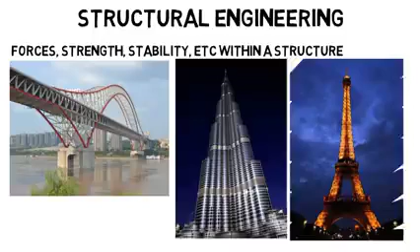So first, structural engineering is about calculating and understanding the forces, strength, stability, and so on within a structure. It could be a bridge, a skyscraper, a landmark, or even a spacecraft or aircraft. Remember, these structures are very heavy and need to support their own weight so that they don't collapse. Now this subfield is the most math intensive and has lots of physics.

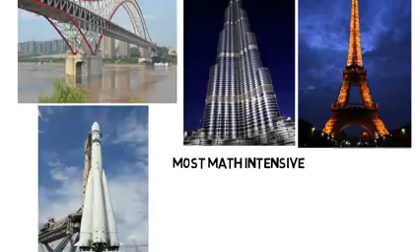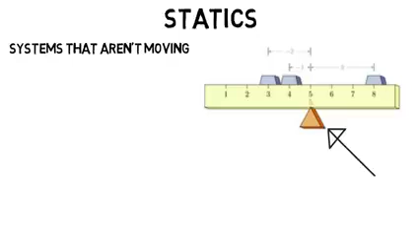All civil engineers will take a class called statics, which is all about the forces and systems that are not moving. In basic physics, you may have done a statics problem, like where does this support have to be for the system to be totally balanced and therefore not moving. You summed all the forces which equaled 0 and all the torques which equaled 0. And that's the basics of statics.

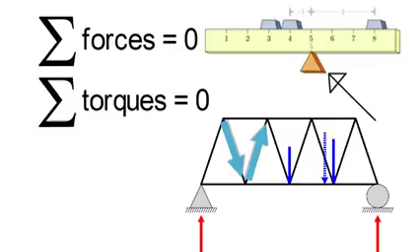So if you're looking at the forces within a bridge or truss, well, the same principles apply, but now there's just more to it. The weight is straight down as shown in blue, all the beams exert forces on one another, but the sum of them is equal to 0, and the torque sums to 0 as well because the bridge is not moving. And it's of course even more complicated than this, but if you enjoy that kind of basic physics you see above, then you'll likely enjoy the statics and physics you see in structural engineering. So that's just a very simplified explanation, but now let's dive into some of the classes they would take.

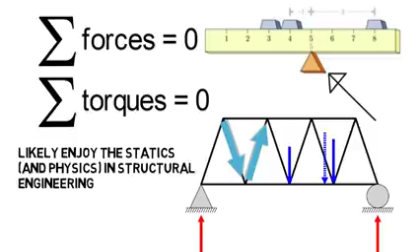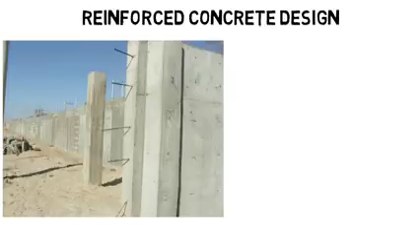One class that would be important for structural students is a reinforced concrete class. In concrete structures, they reinforce it by putting steel beams in the concrete. We can't see those beams, but here, before construction is done, you can see them sticking out, or you can see a lot of them on these unfinished columns. So why do they do this? Why isn't concrete good enough?

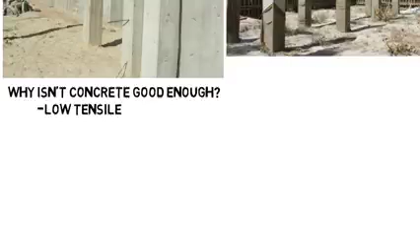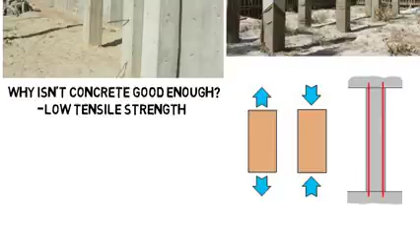Well, concrete alone, once hardened, has low tensile strength, as in it does not handle being pulled very well. However, it's okay with being compressed. But to counteract that low tensile strength, they add steel beams and pour wet concrete, which hardens around them, and then those steel beams have high tensile strength to counteract those types of forces on the structure.

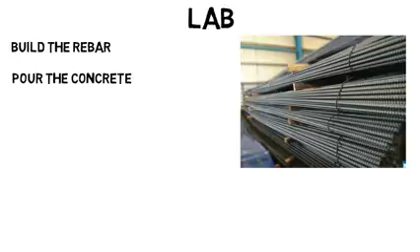So in a lab for this class, you might build the rebar, or the steel reinforcing rods, pour the wet concrete onto them, then once it dries, use a machine that holds the beam on both sides, then apply forces in the middle and keep increasing the force until the beam breaks or cracks and starts falling apart. That force being applied is sent to a computer that tells us the loading on the beam so we can collect the data and get the properties that we need.

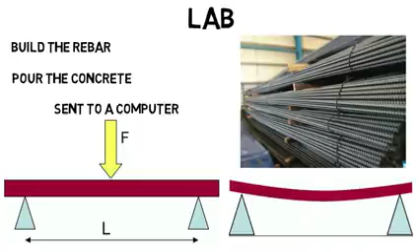You can take structural dynamics as an elective class. Dynamics is about moving systems, unlike statics. So this is one of the few classes where motion is included. So whether it's wind or an earthquake that shakes a building, you need to know how that motion will impact the structure itself and all the forces within it.

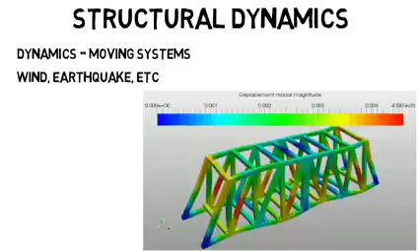I've shown this animation before, but mostly for mechanical engineers as it's a vibrating system that they could analyze, but civil engineers could get into this as well. They have to make sure their designs can stand up against any type of movement the structure may be subject to. You could take an elective class on seismic analysis, which is specifically about calculating the responses of a structure to an earthquake, or one on bridge engineering, which would be a class on highway bridges, materials used, distribution of loads, and how forces are spread throughout the structure, and so on.

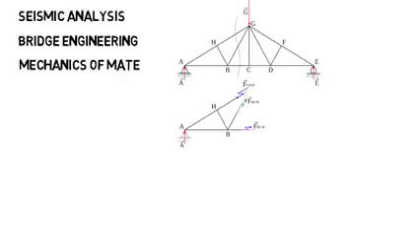Mechanics of materials, like how twisting and bending a beam or column causes it to become internally stressed. Timber structure design, which is about analyzing properties and forces within wooden structures, and much more. See how even if you choose structural engineering, you could still take many different classes from the other structure students? It's a very broad major, but hopefully you really get the idea by now.

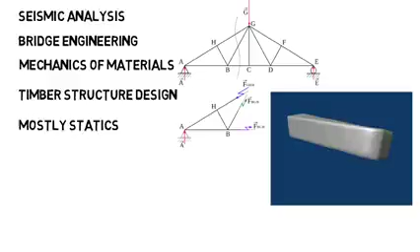You may still have to do hand calculations, but most of the rigorous analysis you learned in school will be left to the software.

Now let's move on to geotechnical engineering, and you'll already see how different these disciplines are. Geotechnical engineers are concerned with the behavior of earth materials like rock and soil, but the main focus is soil. This may seem odd, but you'll see how important this is.

The structural engineer can do everything right to make sure the building will stand up, but if the geotechnical engineer messes up and you put a structure on soil that can't withstand it or is uneven, the building could fall, sink into the ground, or even lean to one side, probably the most famous being the Leaning Tower of Pisa, which was a result of soil issues.

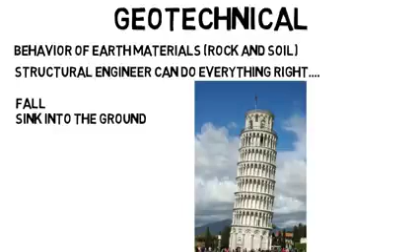Then they also have to consider the foundation of the structures that are being designed. Like, should they have a shallow foundation or a deep foundation? You may not realize it, but our houses and all the buildings you see have foundations that go underneath the earth to keep the structure as stable as possible by transferring the weight from the structure to the earth.

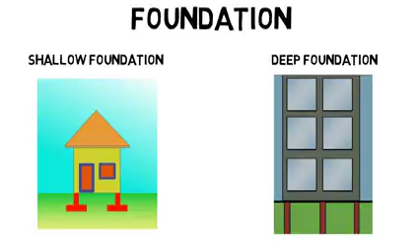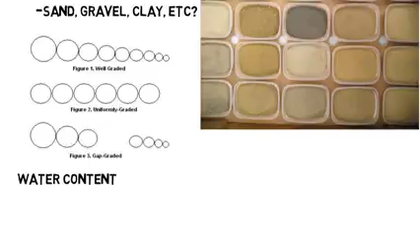But geotechnical engineers rely heavily on testing. So a lab you might see in college is to go out as a class and collect soil samples around your university and bring them to lab. You would have to classify it, like is it sand, gravel, clay, etc. There are many soil types, and you may have to look at the grain size or how it reacts to water. You determine its water content by analyzing the sample, which will be comprised of solid soil, water, and air of different masses and volumes.

But most importantly, you'll measure how the soil will react to mechanical loading or to different forces acting on it. So you might perform a triaxial test, for example. Too complicated to explain for this video, but essentially you put the soil in an enclosed area and apply a force or load to the top, which pushes down on the soil. Then pressure sensors measure the pressure at different points to see how the soil is being affected.

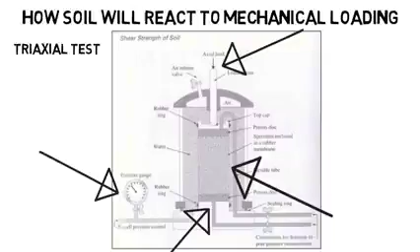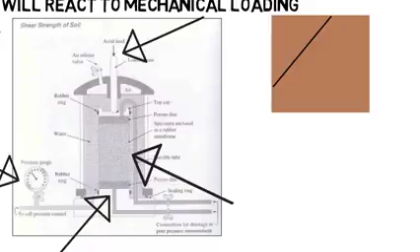If you imagine a square sample of soil and you add a force to the top, the soil can fail along some weak plane. Basically, the weight overpowers the friction holding the soil particles together, and the soil will start to slide, which is known as shear failure. Its ability to stand up to this is known as shear strength, which is one thing that the triaxial test on the left tests for.

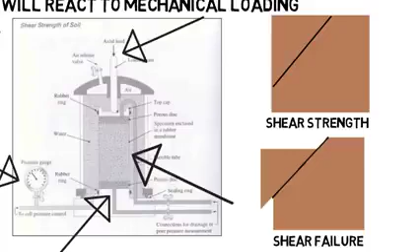And this leads us to what a career in geotechnical engineering could be like. You might be the person who goes out to the field where a structure is going to be built and collects soil samples all around the area for testing. Or you could do testing at the field.

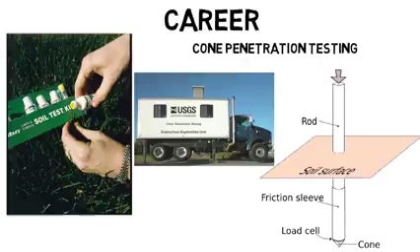One of the most used tests right now in this field is cone penetration testing, where a large truck goes out to the field which has all this equipment on it, and a cone is pushed into the soil, and the pressure will be monitored by a computer on the truck as it moves through the soil into the earth. Based on the pressure, you can analyze the soil mechanical properties.

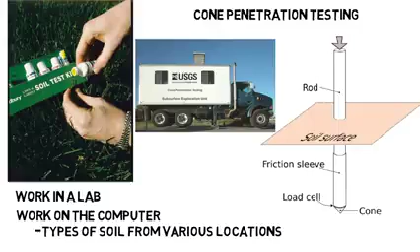Or maybe you could work in a lab where you would do the testing on the soil after it's been collected, like I showed with the triaxial test. Or maybe you could work on the computer and input the different types of soil from the various locations at the site, so you can digitally lay out the area that the structure will rest on. So you could be in the field, in the lab, or on the computer.

Your elective classes could include geotechnical earthquake engineering, which would be like learning the dynamic behavior of soil as opposed to the structure itself. Then slope stability analysis and how to safely design structures on slopes. An example would be an embankment dam. Analysis of deep foundations, where the structure goes deep into the earth for a stronger support, like for skyscrapers. And of course, there are many more classes.

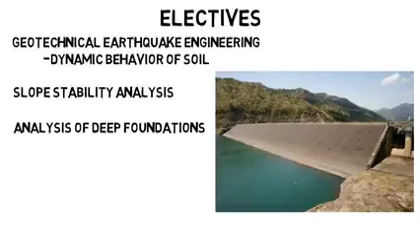Now let's move on to water resources engineering. This is about the design of systems to manage human water resources. They can work on a water treatment facility, designing dams, pipelines, channels, canals, and so on. Maybe you have to design a storm drain system in the event of a large storm. Where is all the water going to go, and how will you get it to the ocean efficiently?

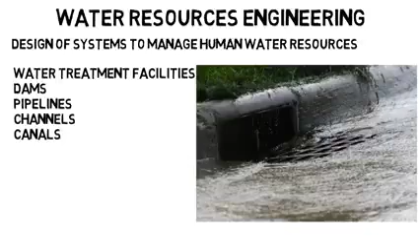Or you could design a canal, which is an artificial waterway to transport water for irrigation, or can be used for ships and boats. Or you could design a culvert that will allow water to flow under a road or trail or some other obstruction.

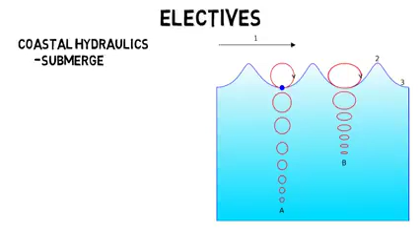Elective classes you could take include coastal hydraulics, where you learn about ocean wave propagation, submerged pipelines, seawalls to protect human habitation, and so on. Or open channel hydraulics, which is about fluid flow in an open channel as opposed to a closed channel or pipeline.

And last is transportation engineering. This is about safe and efficient movement of goods and people. These are the engineers who design streets, roads, highways, railroads, public transportation systems, and even airports.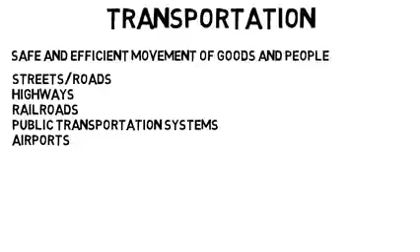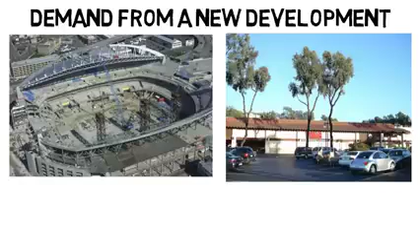So maybe this engineer has to look at the kind of demand from a new development, whether it's a new stadium in your city, all the way to a new grocery store in a new location. This is going to cause new types of traffic throughout the area. The engineers would try to optimize how the new development impacts existing traffic. They would look at data from other similar places to see what kind of traffic they get, then try to make improvements where possible.

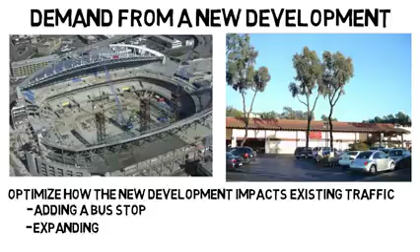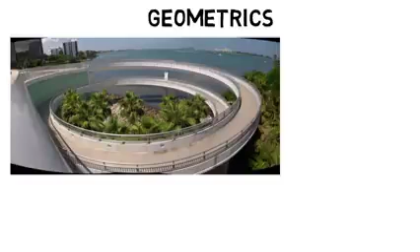It could be simple like adding a bus stop in the nearby area, all the way to expanding the roadway to allow for more traffic. They could work on the geometrics of the roadway, such as what radius of curvature does an off-ramp have to be for a car going 55 miles per hour so the tires won't slip. Or if they're going up an incline, the driver needs to see far enough ahead of them to stop if there's a sudden obstacle. Or what do the cross sections of a freeway need to be for the lanes and the shoulders to accommodate the amount of traffic that's expected?

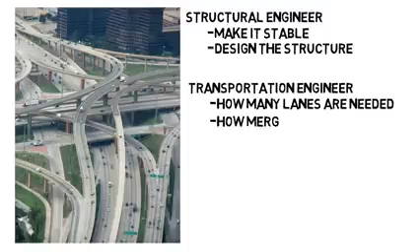Or let's say a highway interchange is being designed. A structural engineer would make it stable and design the structure itself, but the transportation engineer would determine maybe how many lanes are needed for the interchange based on traffic, or how the merging should happen to maximize safety. They make sure that the layout is designed to maximize traffic flow and safety rather than the physics of the structure itself.

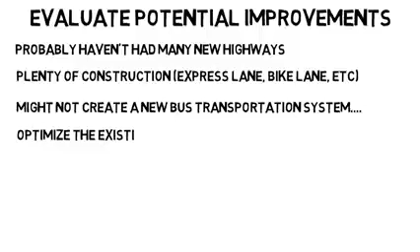Often these engineers evaluate potential improvements to cities in terms of transportation rather than create a totally new design. As in, you probably haven't had many new highways put into your city in the last few years, but there's probably been plenty of construction, whether it be adding an express lane or a bike lane, etc. So they might not create a new bus transportation system, but they may optimize the existing one. Maybe they take data from how many people get on the bus, how long the bus takes to complete its route, how long people are waiting for the bus, and so on to optimize the route, the amount of stops, and more.

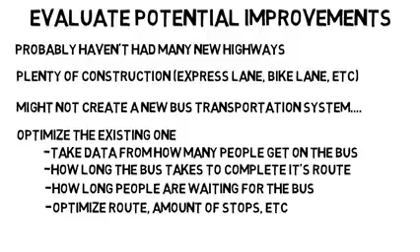Your career will also likely involve a good amount of computer work. You might have to create a layout of the new lane, off-ramp, bridge, or whatever you're designing on AutoCAD, which is a very important software for civil engineers. Or you could use software to analyze and simulate traffic. You could actually lay out the roadway of a city and use collected data of traffic during different times of the day and simulate new additions.

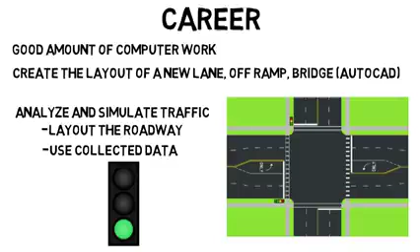Like you could add in a stoplight somewhere and see what the new traffic would be like. Or you can make a minor change, like make a certain stoplight stay green for just a few seconds longer and see how it affects traffic on those streets. And just note, this is not a very math-heavy field. In fact, it's probably the least math-intensive of the 4 subdisciplines I've talked about. It's more about taking data and analyzing it.

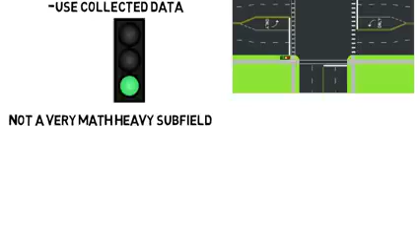Even when I talked about the radius of curvature and how fast someone should be going, you won't use the coefficient of friction and do circular motion physics or anything like that. You use even simpler equations to get what you need.

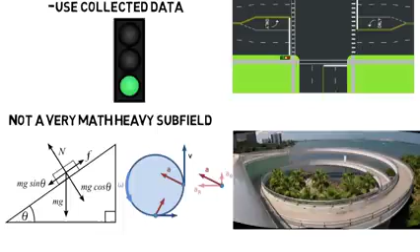Now that's all the main subdisciplines of this major, but there are some final thoughts I want to include. If you're watching all this and are more interested in the artistic aspect of building and structure designs, then architecture will be better for you. Architects deal more with the floor plans, spatial concerns, and the shape and design of the buildings. They have to have an understanding of structures and physics, but not quite as much as a structural engineer.

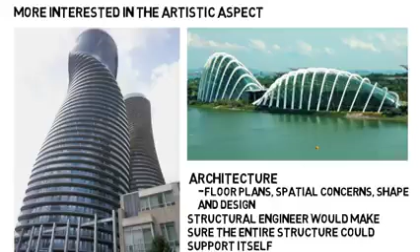They would hand off their design to the structural engineer, who would really make sure the entire structure could support itself, and they would deal with more of the technical work. Then, if you want to be the one who puts on the hard hat and does all the hands-on work with the machines and physically builds the structures, then construction will be better for you.

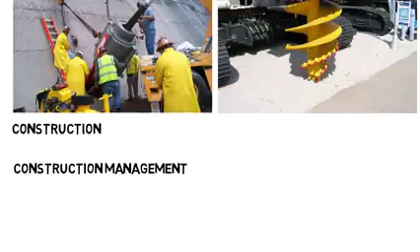But then there's also construction management, which you can still get a job in as a civil engineer. Construction companies will hire civil engineers because of their technical background. Construction is the hands-on part, but construction management is more about guiding the construction, putting together schedules, budgeting, and figuring out how all the pieces will come together.